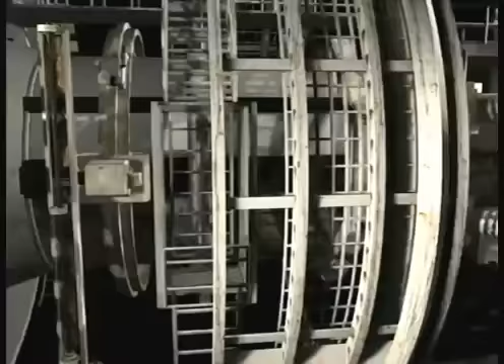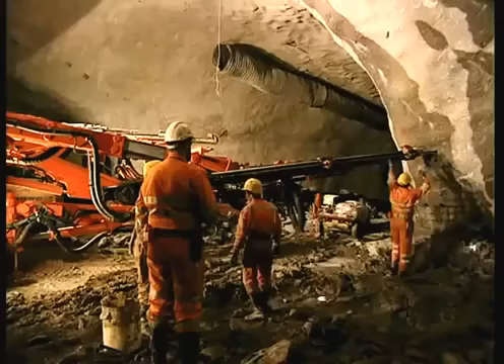It will take the largest drilling machines on this planet, each more than 3 stories high and longer than 4 football fields, drilling 24 hours a day for 6 years to get the job done. The project is incredibly dangerous and outrageously expensive. The price tag, $7 billion. Can it be done? Or will unforeseen problems bankrupt the project before it's finished? Will engineers be able to avoid the horrible fate of so many other tunnels? Fire, disaster, and death.

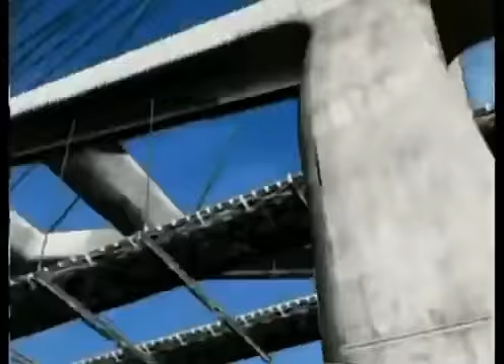To the outside world, Switzerland is a picture postcard. But the reality is not so pretty. Because of Switzerland's central location, each year 14 million trucks and cars coming from every corner of Europe pass through Switzerland on their way elsewhere. The sheer volume is fast turning this country into the biggest traffic jam in the world. An obvious solution: put more freight and passengers onto trains to reduce the number of trucks and cars on the road. But it isn't that simple. The antiquated railway system is already jammed to capacity.

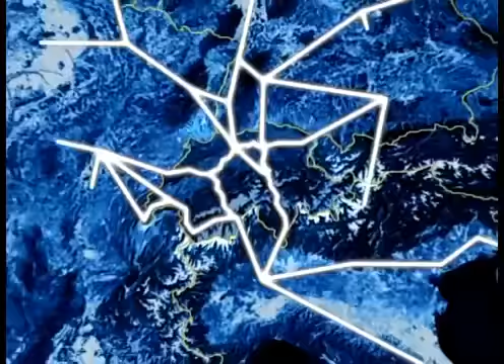In 1998, Swiss voters decided that something had to be done. So they voted to authorize a whopping $21 billion for a mammoth project. A high-speed rail network to be built under the Alps, connecting Switzerland to the major cities of Europe. The scale of the proposed project was staggering. It would require 2 separate tunnels, each one far longer than any mountain tunnel ever built.

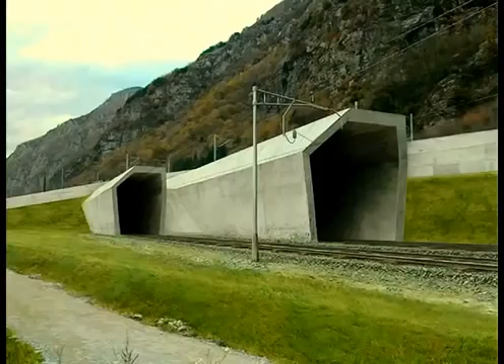The shorter of the tunnels, named Lötschberg, would run for 21 miles under the mountains in southwest Switzerland. 50 miles to the east, an even longer tunnel would run 35 miles through the Alps. Since it would run directly under a mountain range named Gotthard, it would be called the Gotthard Tunnel. 3 times longer than any other mountain tunnel in the world, the Gotthard Tunnel alone will cost $7 billion. Enough to have built the Golden Gate Bridge 17 times.

The tunnel's path will be straight and flat, right through the base of the mountain range. This route will let freight trains race through the mountain at 100 miles per hour, more than double their current speed. And passenger trains will go even faster, up to 155 miles per hour. Swiss voters were sold on the benefits of the proposed project. But they were also worried. They insisted that designers come up with plans to minimize the project's potentially devastating environmental impact.

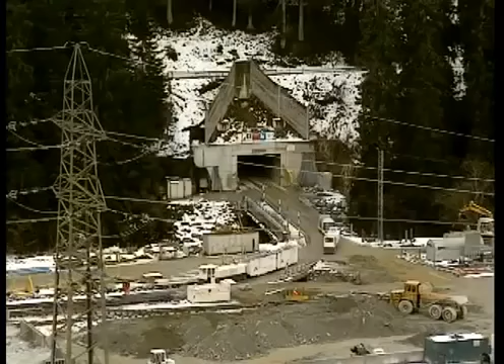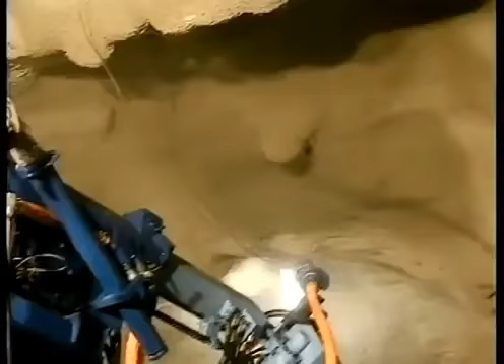So the contract approved by the voters put enormous pressure on the engineers and the contractors. First, there was the guarantee. The engineers would need to certify that the tunnel would last at least 100 years. That meant that literally every material used in the tunnel would need to be subjected to the most rigorous testing in history. But that wasn't all. The contract also called for the tunnel to be built fast. And if the builders made mistakes that put the project behind schedule or over budget, they would risk paying stiff financial penalties.

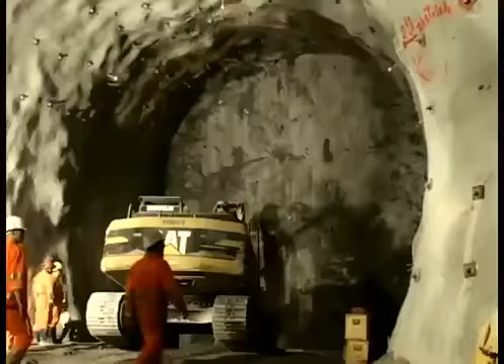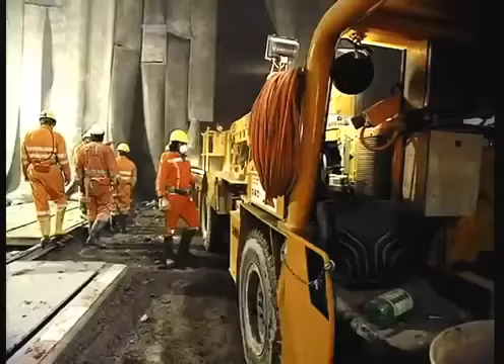We're not allowed to forget cost and time scheduling. Those are very risky things. And you just got to keep all of that in control. And everybody's just really aware the whole world is watching us, and we've got to get everything right. Even without these added pressures, the Gotthard Tunnel project would still seem like an impossible task, just from the scale of the work itself. The miners will have to dig 24 million tons of rock out of the Alps. An amount that would fill over 16 football stadiums.

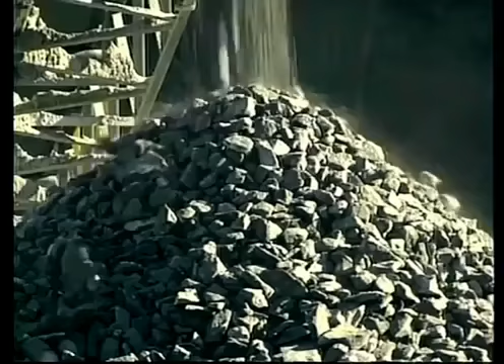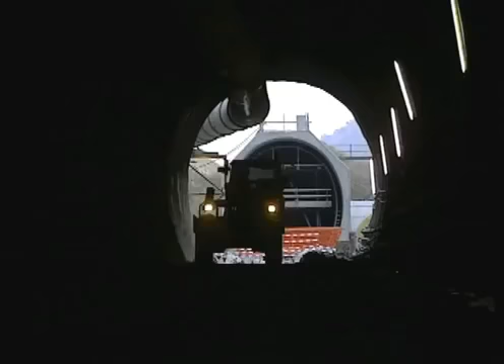Working conditions are extreme. Because the tunnel lies so deep underground, temperatures inside can reach 115 degrees. The miners work in near darkness and breathe thin, dusty air. Every day, they put their lives on the line. The biggest danger is a lack of oxygen. In case of emergency, fire, explosion, the first thing that goes is the oxygen to breathe, because we're underground. We've got dumpers, we've got excavation machinery that move back and forwards. They're just moving around all the time.

It's dark. Drivers don't see people walking around behind, and it could be, if they reverse out, that somebody gets hit by machinery. And the dangers don't stop there. Tunneling, after all, is a battle between man and the Earth itself. Cave-ins are a constant threat.

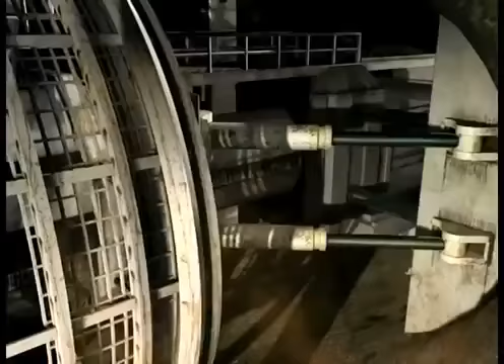To minimize the risk, geologists take samples deep inside the mountain before any drilling begins, to find out just what kind of rock the drillers might encounter. A lot of sections we have rocks like this, real hard, gneiss, granites, where we go through by a tunnel boring machine. The tunnel boring machine, or TBM, designed for the Gotthard Tunnel, can chew away at hard rock.

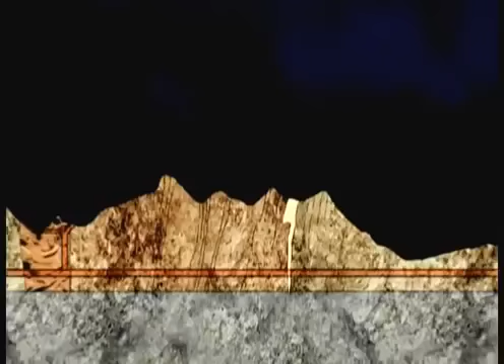But if the miners encounter soft or unstable areas, they have to use a different method. The rock must be drilled and then blasted out. And in areas where there are high-pressure water zones and crumbly rock, none of these methods can be used, and the danger increases exponentially. In 1996, during the initial surveys, geologists discovered such an area, sitting near the path of the proposed tunnel.

The geological team taking core samples got hit by a sudden, powerful explosion of sand and water. It's like you're in a submarine, 3,000 feet under sea level, and you drill outside into the sea. You hope that the water doesn't come into the submarine. So it's really life dangerous. Fortunately, no one was killed in the accident.

But the incident threatened to stop the project in its tracks. The engineers estimated that stabilizing the area would cost an extra $600 million. That money simply wasn't in the budget. It took another half year of drilling deeper down before the geologists found a route that avoided the danger zone. And then we found a totally different rock. We found a marble. So this is not a difficult rock, so we can go through by TBM.

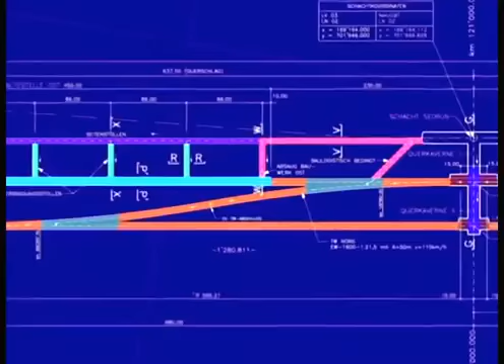Now that a safe path through the mountain had been determined, the design team could move on to their next big decision. What would the tunnels themselves look like? A single large tunnel with 2 sets of tracks inside would be the cheapest solution. But this design had a fatal flaw. If a train derailed inside the tunnel, it could hit an oncoming train or block the tunnel in both directions.

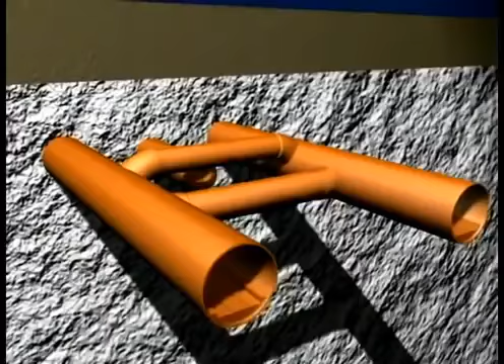A safer alternative would be the 3-tube system, like the one used in the Channel Tunnel between France and England. The Channel Tunnel has 2 single tunnels, one for each direction, and a smaller central tunnel for emergencies. That third tunnel proved a lifesaver on November 18, 1996. That evening, a train carrying several trucks entered the tunnel on the French side. The conductor was unaware that one of the trucks had somehow caught on fire.

At the time, there were 6 trains in the tunnel, including 2 passenger trains. 12 miles inside, the conductor brought the burning train to a dead stop. He tried to get the passengers out, but the smoke was so thick they could barely see the exits. Eventually, they were able to make their way to the safety of the central emergency tunnel. They were very lucky. The fire was so intense in the tunnel they had left, it melted part of the concrete lining. 2 people suffered serious smoke inhalation. But thanks to that central emergency tunnel, nobody died.

The lesson was clear. Tunnels will always be dangerous places, but a good design can reduce the risks. You will never get a completely risk-free tunnel. You have to design it to cope with the foreseeable risks that might be faced. But at the end of the day, there are certain things called emergencies in which you have to have an emergency plan, whatever the situation you have.

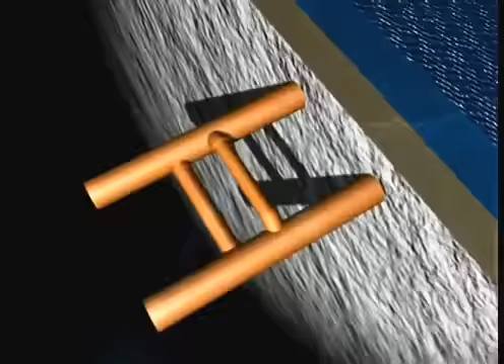The Swiss engineers carefully considered the pros and cons of each design. The single-tube system was clearly too dangerous, but the 3-tube system was far too expensive. So they came up with something else, a double-tube design. Separate tunnels going north and south that would reduce the risk of a head-on collision. To enhance safety, they added passageways every 1,000 feet. These would allow emergency crews to move between both tubes.

2 crossover points along the track would allow trains to switch from one tunnel to the other in an emergency. The designers added another crucial feature, a series of small passageways connected to an escape route that crosses over to the other side. Each tube would have 2 of these emergency stations.

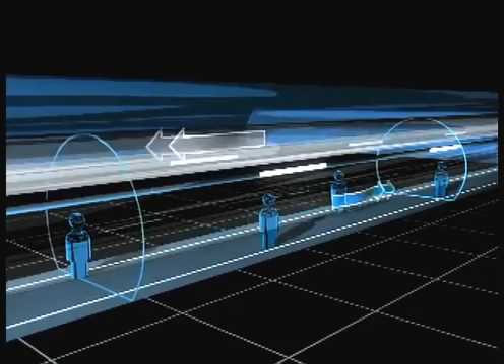If a fire were ever detected, the computers in the command center would guide trains directly to the closest emergency station. Passengers would then evacuate the train and make their way to safety. A pair of massive ventilators at the portals would bring in fresh air and push out the smoke. On paper, this is perhaps the safest railway tunnel ever designed. But until it's tested, no one will know for sure.

Now, the engineers had a workable design. Next, they needed to plot the tunnel's precise path. The plan called for massive tunnel boring machines to burrow in from the north and south. The trick is, how to make sure they meet in the middle. If they miss by just 6 inches, tunnel workers will need to redig hundreds of feet of tunnel to get back on track.

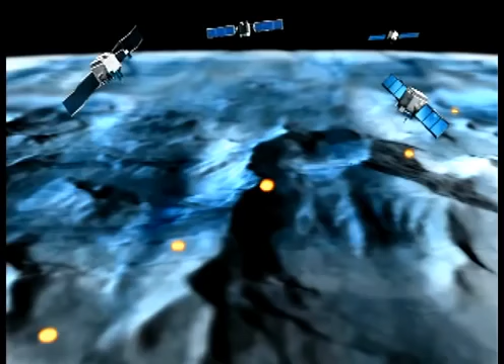So to make sure they had the most accurate mapping information, the engineers turned to the Global Positioning System, GPS. GPS receivers were placed at the north and south tunnel entrances, as well as 3 intermediate points along the proposed path of the tunnel. Next, 4 GPS satellites in geosynchronous orbit above the Earth beamed signals to the receivers, which gave them their precise coordinates: latitude, longitude, and altitude. Once the engineers had these coordinates, all they needed to do was connect the dots.

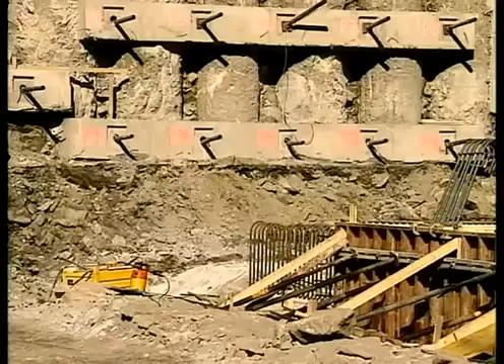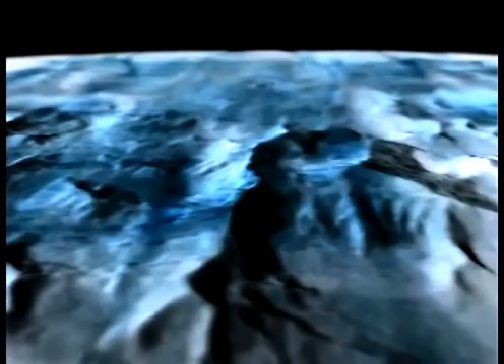The plans were complete. Now the real work could begin. Base camps were set up to launch the attack on the mountain. Because the job is so enormous, the engineers plan to enter the mountain from 5 distinct starting points. It's a new system or a new way to excavate such a long tunnel. It would have taken us about 20 years to meet up because it's so long. With these measures of attacking with 3 intermediate attacks, we've speeded up the whole excavation phase by about 6 to 10 years.

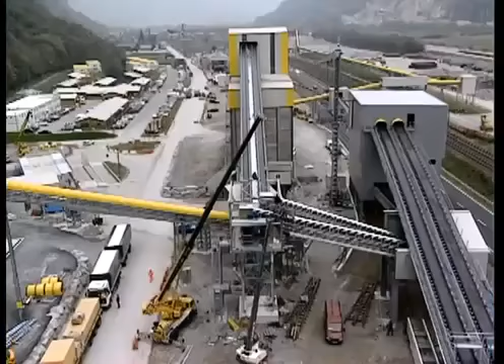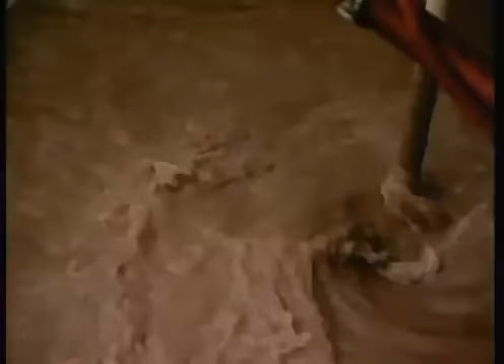Each starting point would have its own base camp, complete with concrete factory, water treatment center, living quarters for workers, cafeteria, even a mass transit system. The base camps would play a crucial role in keeping environmental damage to a minimum. A major concern was water. Drilling would contaminate huge quantities of pure mountain water that had been locked inside the mountain for millions of years. Water treatment plants at each base camp would filter out contaminants and then channel the water to nearby rivers.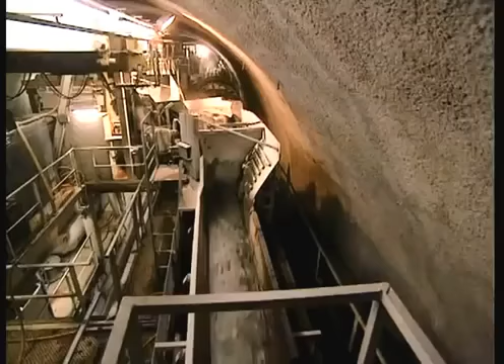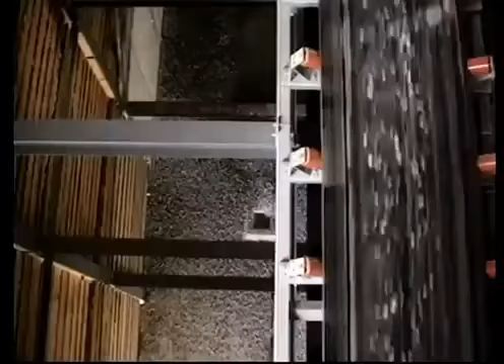But an even greater concern, rock debris. What could be done with the 24 million tons of rock the miners would carve out of the mountain? They came up with an ingenious plan. Recycle it back into the project. Concrete factories at each site would transform the rock to produce the 7.5 million tons of concrete needed to line the tunnel walls. That's enough concrete to pave an 8-lane highway 300 miles long.

Once the facilities were in place, project managers could start bringing in manpower. 1,800 workers were brought in from all over the world. Among them, the world's best technicians, explosive experts, and heavy machine operators. With the army in place, the full-scale attack on the mountain could begin. Their first task, build access tunnels into the rock. These tunnels are needed to get the workers and equipment to the actual work site deep inside the mountain. The workers would enter the rock in trains, buses, even an elevator.

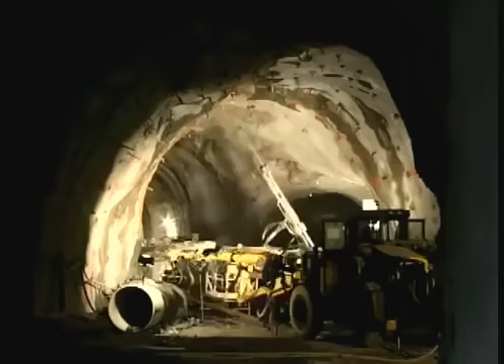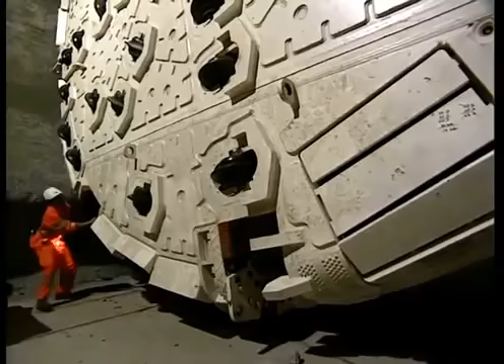The schedule required work to go on around the clock, 7 days a week, for 12 years. Drilling, digging, blasting. Just to make the deadline. But even at that pace, the project would be completely impossible without this. This is one of the biggest tunnel boring machines in the world. It's a drill with a drill bit 30 feet in diameter, designed to bore a tunnel through some of the hardest rock in the world.

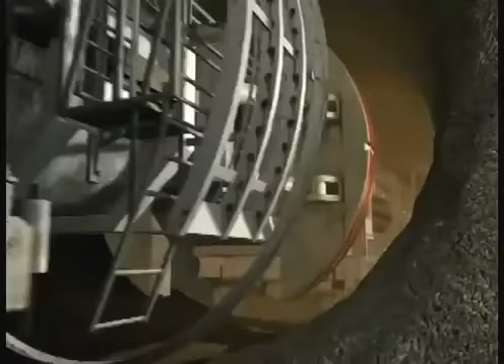How big is it? 3 stories high, 4 football fields long. At full throttle, it can advance through 130 feet of solid rock in a day. But even this gargantuan machine had never been tested under these conditions. Could it withstand 6 years of constant grinding? To improve the odds, the engineers had to arm the machine with the best possible weaponry, custom made for the job.

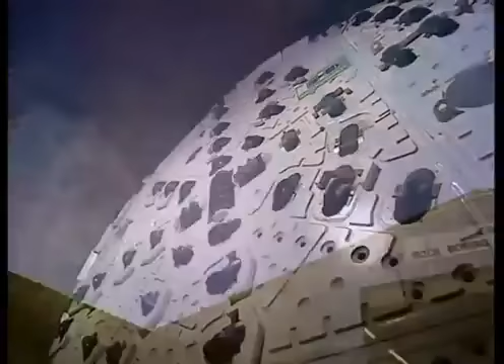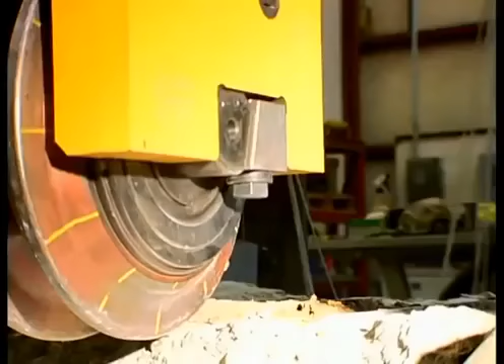The best custom drill bits for tunnel machines are designed here at the Colorado School of Mines. Looks like you are getting some overbreak over here. Where researchers test individual cutters, the steel alloy rollers that actually grind the rock face.

To guarantee each cutter is best suited for its job, a rock sample from the tunnel site is placed on this machine. A cutter rolls over the rock again and again. The machine measures the force needed to cut through this rock.

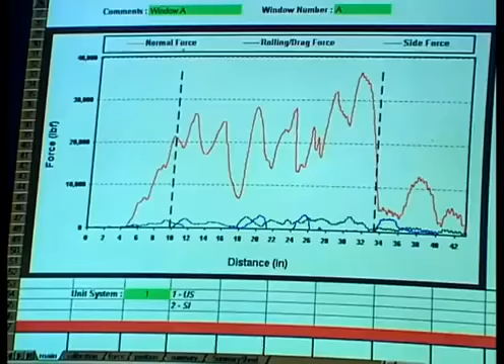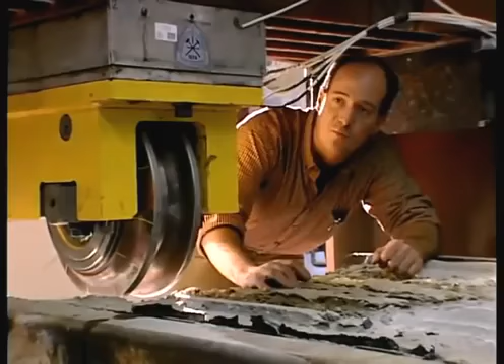The data we get from these tests allows us to design cutter heads that'll best match the tunnel boring machine to the rock being bored through, thus making the machine as productive as it can be, or go as fast as it can. The testing is critical. If the cutters are not made right, they could wear prematurely and slow the project down.

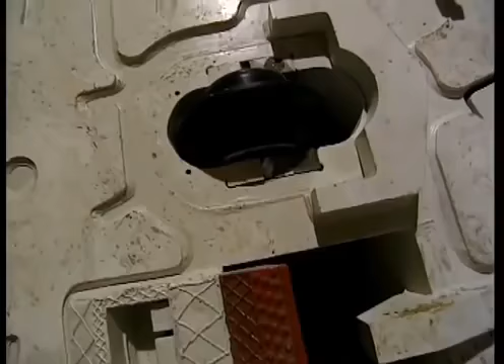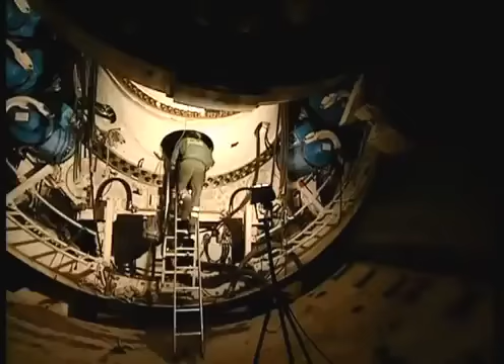58 of these cutters, each 17 inches in diameter, are mounted to the front of the boring machine's cutter head. The custom-designed cutter head was made in Germany and then shipped to the tunnel site back in Switzerland. It then took 3 more months for technicians to attach the cutter head to the machine. Meanwhile, the clock kept ticking.

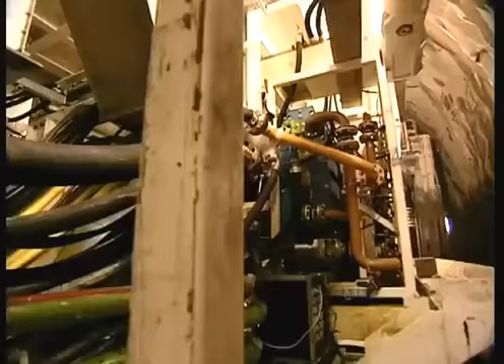In November 2002, the cutters finally had a chance to test their chops. It was a critical moment. Engineers, miners, and politicians gathered in the depths of the Alps to see if the giant would really work. They waited.

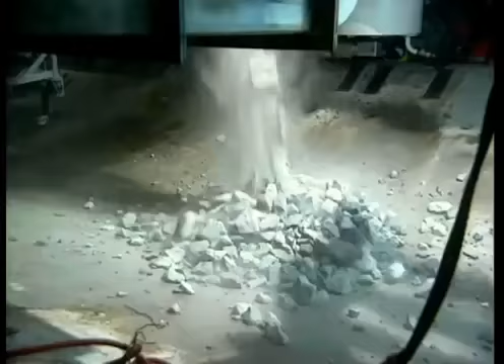Suddenly, the beast came alive. Its 3,500 kilowatt engine cranking out 4,700 horsepower. The massive cutter head turning, pulverizing the granite into tiny bits. Everyone breathed a gigantic sigh of relief.

Of course, the cutter head doesn't do the job alone. The Gotthard tunnel boring machine is a complex marvel made up of 90,000 parts. Aimed precisely in the direction of the tunnel to be, a pair of gripper pads is pressed against the rock, locking the boring machine in place. The powerful hydraulic arms attached to the gripper pads push the cutter head forward, driving it into the rock.

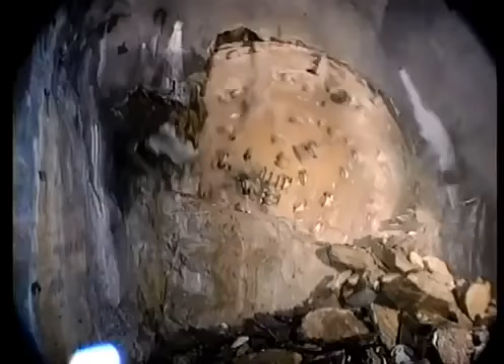The cutter head turns counterclockwise, crushing the rock into small chips with its 58 cutters. Each cutter can exert 26 tons of force. That's like 58 cars simultaneously hitting a rock wall at 26 miles per hour.

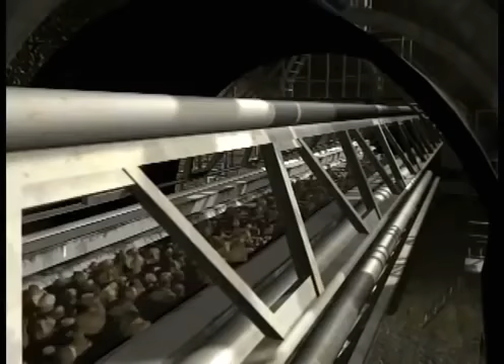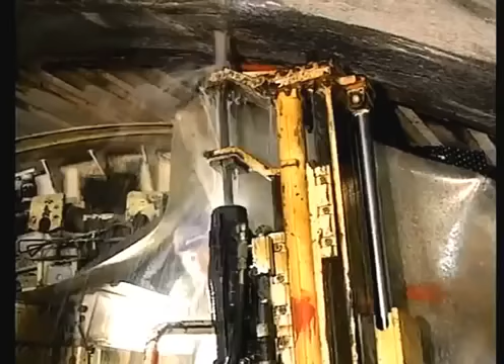As the cutter head grinds, the small chips fall into a set of rotating buckets. The buckets deposit the chips onto a conveyor belt, which shuttles them out of the tunnel and onto the concrete processing plant. But the tunnel boring machine does a lot more than grind the rock. Directly behind the cutter head, a set of robotic drills punches holes in the tunnel wall for bolt anchors to keep loose rock from falling in.

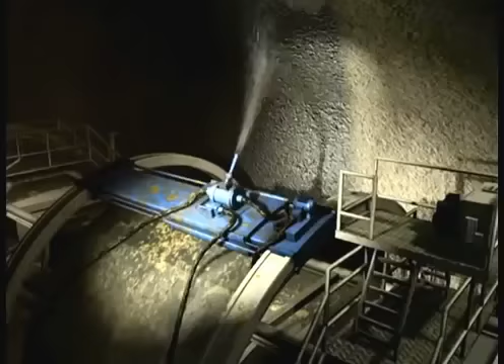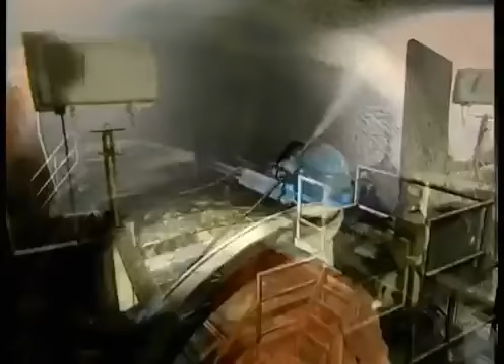65 yards behind the cutter head, a robotic arm sprays every square foot of new wall with a liquefied concrete called shotcrete. In a matter of seconds, the shotcrete dries, hardens, and binds to the tunnel walls. It provides a tough inner skin, which is added insurance against cave-ins. After every 7-foot advance, the workers must stop to reposition the grippers, and the process starts all over again.

The project is so massive and the schedule so tight, the job requires not one, but 6 of these $21 million tunnel boring machines. One pair bores north from the south entrance, while a second pair grinds south from a midway point. Then, a third pair of machines will start at the north entrance and drill south toward the midway point. If all goes as planned, the big machines will finish their part of the job in June 2009.

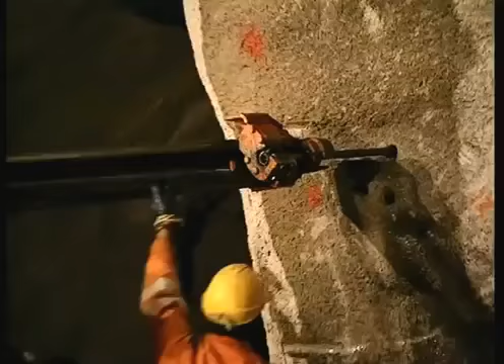But there are plenty of unknowns. And as powerful as the boring machines are, there are some places in the tunnel where they can't be used. That's because these machines can dig only straight and only through hard rock. But the Gotthard tunnel will pass through a few areas where the rock turns soft or is broken and unstable. The risk of a cave-in is simply too high in these spots to use the machine. So they have to be dug out the old-fashioned way, by drilling and blasting.

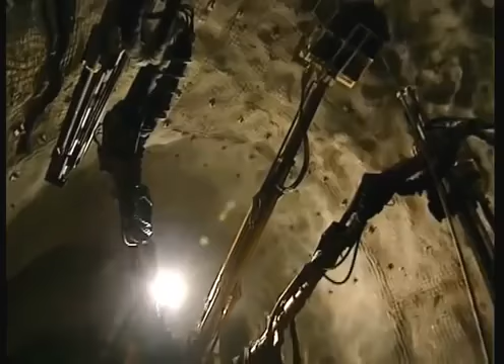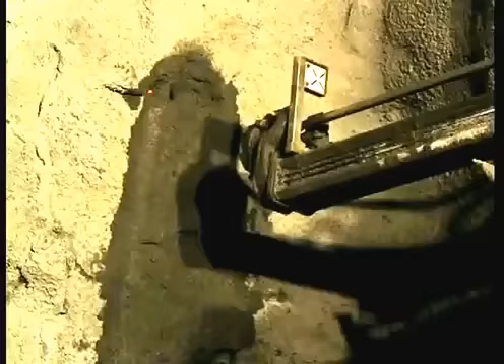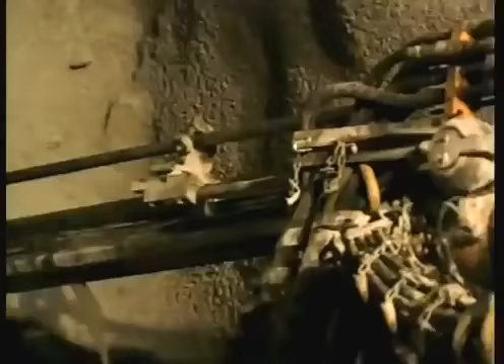This machine is called the rocket boomer. It's a huge rock drill, capable of choreographing an explosion so potent it can remove a perfect circle of rock up to 19 feet thick. First, a technician uses a laser beam to align the drill. Next, the rocket boomer's computer calculates the blast pattern that will deliver the most bang for the buck. Then the drilling begins. Over 80 holes, up to 19 feet into the rock.

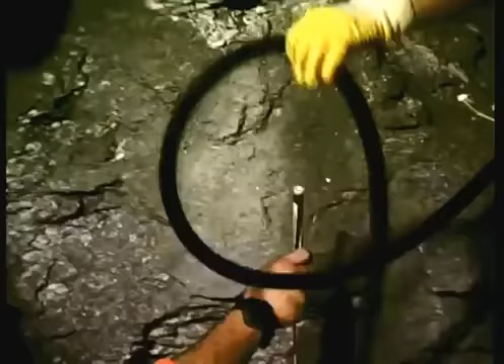Into these holes, a technician pumps precisely measured doses of 2 different chemicals. Each chemical on its own is completely harmless. But if the recipe is right, together they will become a volatile cocktail. To ignite the explosion, the technicians insert an electrical detonator into each hole. With all the leads linked together, a jolt of electricity sets off a massive blast.

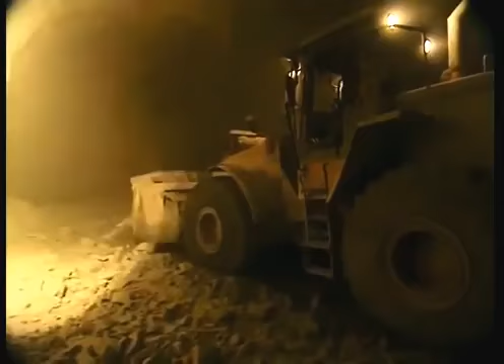Once the dust settles, the rubble is shoveled out. A single blast like this takes 8 hours to pull off. Their workday done, the blast team now makes way for the next shift, who will prepare the next blast.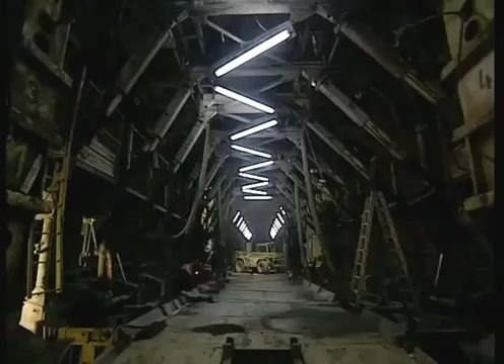50 miles west of the Gotthard, the drilling team working on the 21-mile-long Lötschberg tunnel has almost completed the digging phase of the project. They've also already sprayed the tunnel walls with a layer of shotcrete, the liquefied concrete that stabilizes the rock as it dries. Now, the tunnel is almost ready for its final concrete lining. First, it must be carefully prepared.

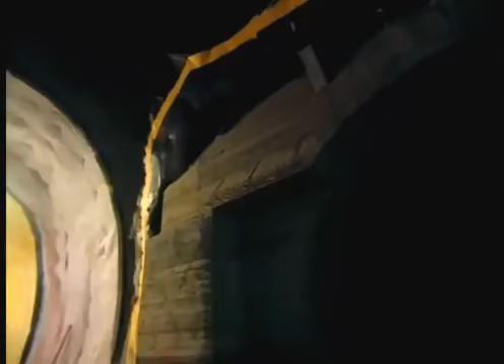At this stage, water is the enemy. Groundwater is always seeping through the rock and must be drained away. If not, water pressure can build up and literally push in the concrete lining of the tunnel. To prevent this, the team applies an ingenious system of layering to the shotcrete wall.

The first layer is a white plastic webbed mesh. The water trickles down the mesh into a drainage system at the bottom of the tunnel. A second layer of solid plastic sheeting seals off any remaining water behind it. This should make the inside of the tunnel waterproof.

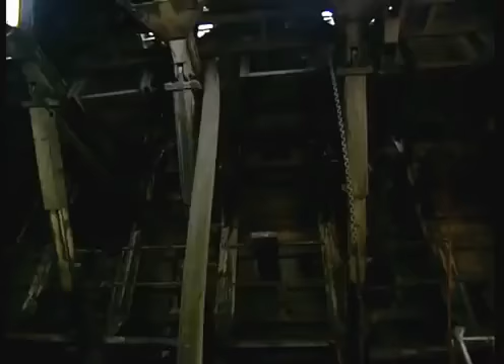Next, huge metal forms are put into place. And then, concrete is injected behind them. As the concrete dries, engineers keep water running over its surface so it won't crack. When the metal forms are removed, the smooth, final concrete lining is left behind.

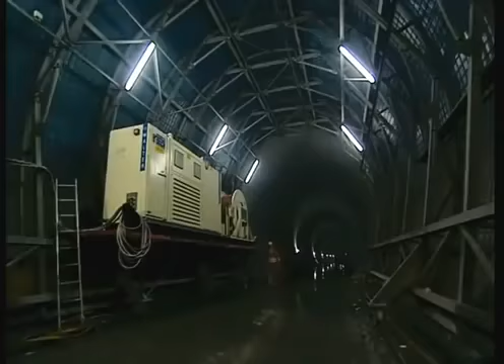Of course, the concrete used in these tunnels is no ordinary concrete. The designers have guaranteed that the tunnels will last at least a century. So everything that goes into the tunnel has been put through the most rigorous testing in the industry. And that's done here, at the most advanced tunnel testing facility in the world, the Hagerbach Test Tunnel, 40 miles northeast of the Gotthard.

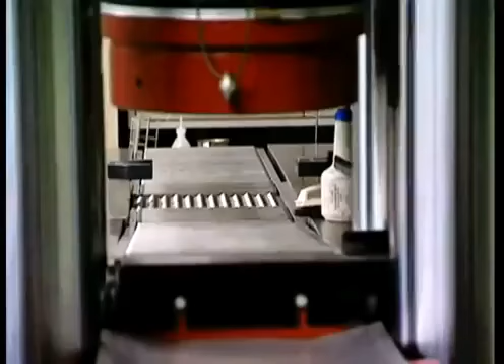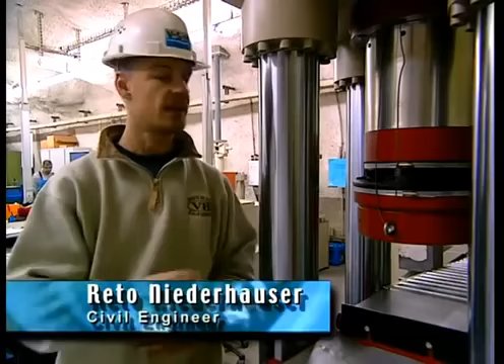The Hagerbach test site is a labyrinth of tunnels crisscrossing and stretching 2.5 miles into the mountain. Here, engineers must test and approve everything used inside the Swiss Alp Tunnel project. In this laboratory, engineers subject concrete blocks to extreme pressure. The concrete lining has to hold up under the mountain's weight as the rock settles. When the deformation and the forces are too high in such a tunnel, then you have some cracks in the lining, or the worst case is that the lining can break down.

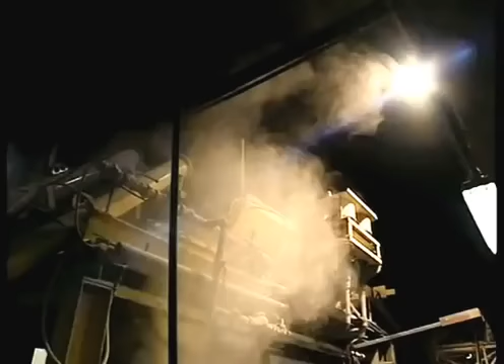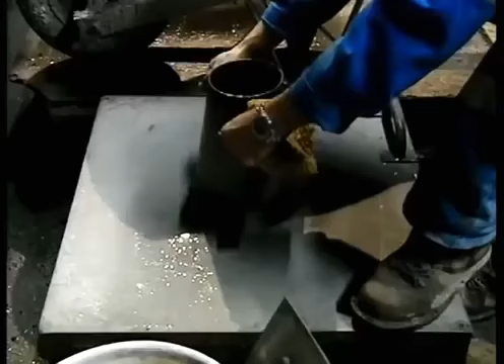Here, engineers are fine-tuning a shotcrete recipe. A mix of sand, gravel, water, and cement that is sprayed onto the tunnel's bare rock walls. The precise ratio of ingredients is crucial. Too little water, the shotcrete will be too thick to spray. Too much water, it will be too weak. Shotcrete also must be able to withstand extreme hot and cold temperatures.

In this area, engineers are testing explosives. Different types of rock need different formulas. Because the Gotthard Tunnel has extremely hard rock, they need an explosive with a lot of kick.

These tunnels are also used to test people, to prepare them for disaster. Fire is one of the biggest dangers in a tunnel. Using wooden crates and gasoline, the engineers simulate a common tunnel accident scenario: a truck on fire. In just a few minutes, the fire is a raging inferno.

In a fire, a tunnel acts just like an oven. Temperatures can exceed 2,000 degrees Fahrenheit, hot enough to vaporize human flesh, even concrete. So firefighters have to be trained to move fast to knock down any blaze.

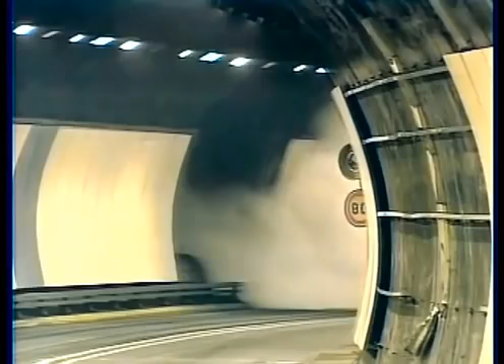March 24th, 1999 started out like any other day. At 10:45 a.m., cars and trucks were speeding into the Mont Blanc tunnel between France and Italy, unaware of what was about to engulf them. About 4 miles into the tunnel on the French side, a truck driver noticed smoke pouring from the back of his rig. He pulled over, but within seconds, his truck was completely consumed in flames.

Unfortunately, the ventilation system was no match for the smoke. It was so thick, it took emergency crews an entire day just to reach the blaze. The fire burned for days. When it was all over, 39 people were dead. Temperatures inside the tunnel had reached 2,300 degrees, melting sections of the concrete lining. The disaster forced a major redesign of the tunnel's emergency systems.

Learning from previous accidents or incidents is absolutely vital. It is one way that you understand how incidents occur, why they occur, how they develop, how people reacted to the incident in any one case, what worked well and what didn't work well. In this case, the lessons were learned the hard way. So engineers were determined to get things right the next time around.

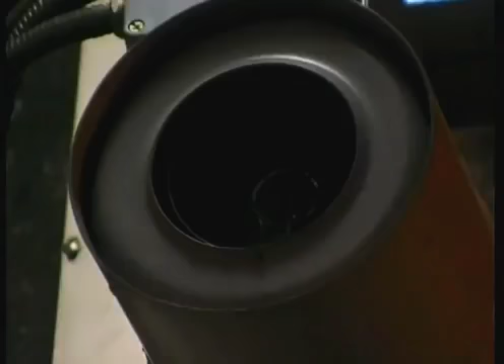First, they added 76 high-powered fans to blow out smoke and bring in fresh air. They set up fire stations inside the tunnel so crews can get to the fire quicker. Now, heat sensors at each entrance scan all trucks for overheated engines. 120 cameras linked to command control centers monitor traffic around the clock.

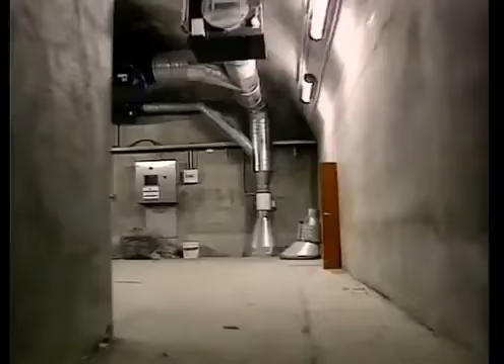The number of emergency shelters was doubled. There are now 37, placed every 1,000 feet, running the full length of the Mont Blanc tunnel. Every shelter has a direct phone line to the central control room. And the engineers added something new, a way out of the tunnel. Inside each shelter, a stairway leads to a passageway below the main tunnel. In a disaster, emergency crews would be waiting there to take the drivers out.

The redesigned Mont Blanc tunnel is considered one of the safest in the world. But even with all the new features, there will always be a risk. No tunnel is 100% safe. Fires occur in tunnels simply because there is flammable material and sources of ignition. And you will never eliminate those completely.

The risk of a fire haunts the designers of the new Gotthard tunnel. Some freight traveling through it will be lethal. Volatile fuels and chemicals that could catch on fire, or even worse, explode. The year is 2015. The new high-speed rail through the Gotthard tunnel is a huge success. Just as the designers had predicted, the roads now run free of traffic jams.